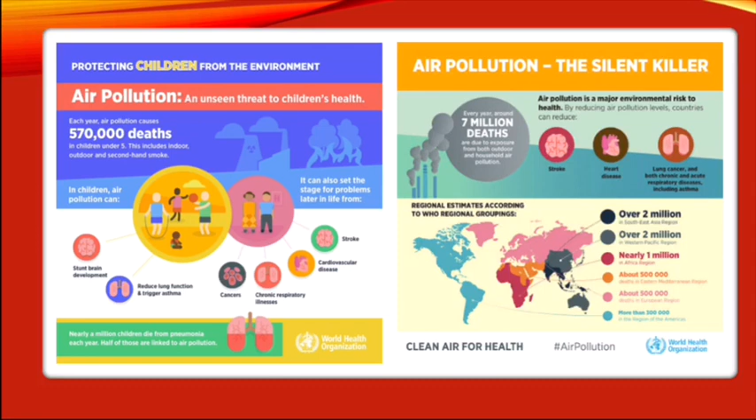Air pollution has been contaminating all around us, everywhere around the world. I can say that almost each and every year the number of deaths is increasing around us, everywhere. This problem needs to be stopped somewhere, and we as human beings need to work together in order to reduce, or to stop this problem from getting worse in the future.

And in conjunction to that, there are actually a lot of solutions that can be done in order to reduce air pollution around us. And one of the solutions that we can propose is to stop using diesel fuel and go for biodiesel fuel.

So these two things are yet different, as the one on the left side is diesel fuel. The diesel fuel that we are using nowadays thus gives a lot of harmful effects and side effects throughout the environment. The emission of diesel fuel is said to be way more contaminated compared to biodiesel fuel.

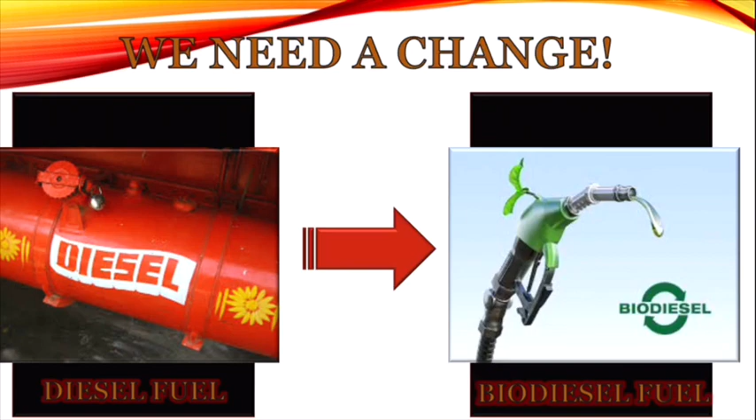So there are lots of advantages to using biodiesel fuel instead of diesel fuel. This kind of matter needs to be considered as we are striving for a better environment around us.

Before going further into the solution of reducing air pollution, the solution that was proposed just now was to substitute conventional diesel with biodiesel. So what is actually biodiesel?

A biodiesel is a clean burning fuel which is produced through a specific process called transesterification. Generally, the production of biodiesel consists of two main components, alcohol and triglycerides, as the main reactants, along with the presence of catalysts such as potassium and sodium hydroxide.

Most countries, especially Japan, America, and those in Europe, are practicing substituting conventional diesel fuel with biodiesel because of several reasons. Practically, biodiesel undergoes a more complete process of combustion compared to conventional diesel fuel. This results in reduced emissions from vehicles, as a complete combustion process occurs when using biodiesel.

Besides that, rather than using petroleum as the main ingredient for the production of diesel, vegetable oil and animal fat are used to replace it, which is considered much more convenient and environmentally friendly, as petroleum contains a lot of chemicals which contribute harmful effects towards the environment.

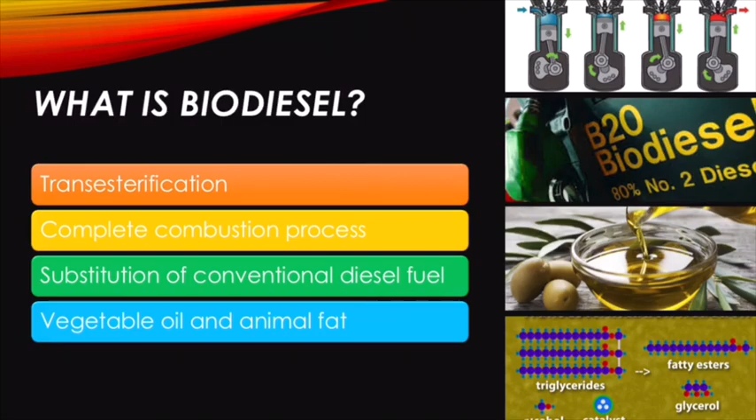By using vegetable oil and animal fat, which are known to be organic and safe, they contribute to a much safer and healthier environment. The oil itself contains fewer chemicals, thus the emission from biodiesel will be much cleaner compared to the conventional diesel we are using right now.

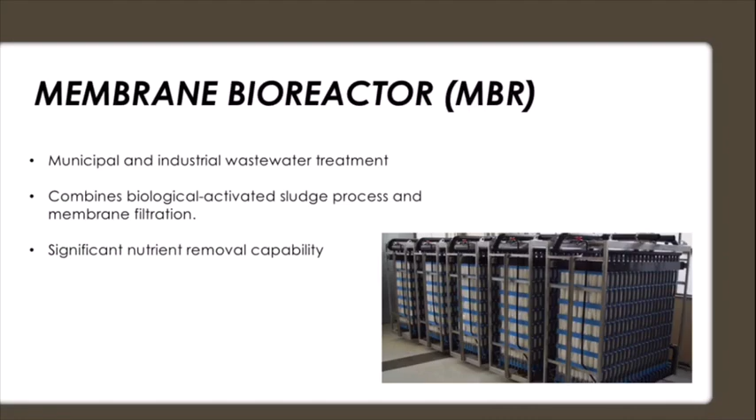Membrane bioreactor technology, which combines the biological activated sludge process and membrane filtration, has become more popular, abundant, and accepted in recent years for the treatment of many types of wastewater. It is the combination of a membrane process like microfiltration or ultrafiltration with a suspended growth bioreactor, and is now widely used for municipal and industrial wastewater treatment with plant sizes up to 80,000 population equivalents.

A ceramic membrane can be categorized under a cross-flow filtration mode. It could withstand more than 20 years for a certain life cycle of a ceramic membrane. The ceramic membranes are often formed into an asymmetric multi-channel element. These elements are grouped together in housings, and these membrane modules can withstand high temperature, extreme acidity or alkalinity, and high operating pressure as well.

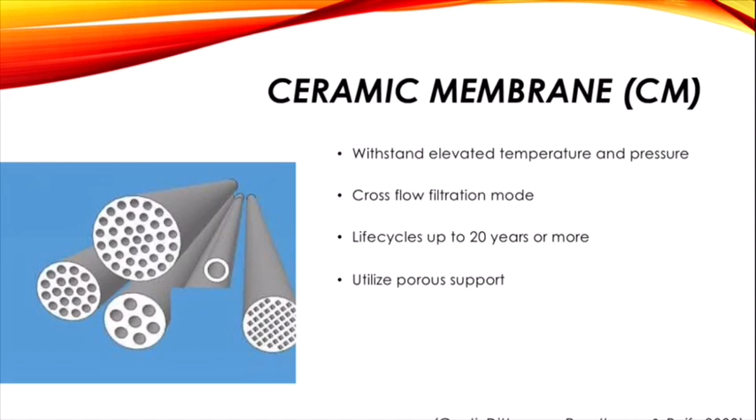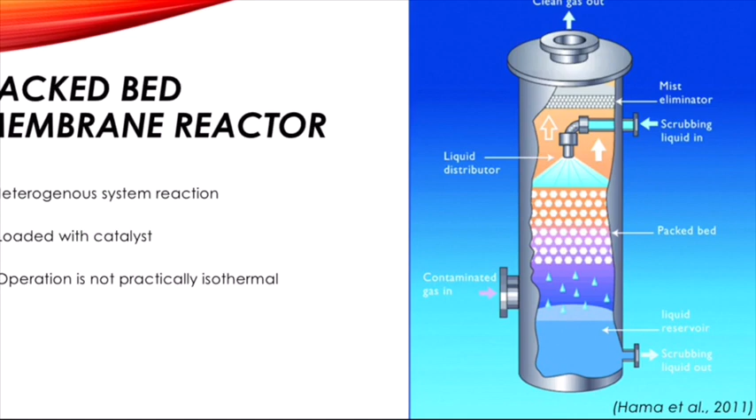A packed bed membrane reactor is categorized under a heterogeneous system reaction. This means that the reactant that will be inserted into the reactor could be more than one component or more than one phase during the reaction.

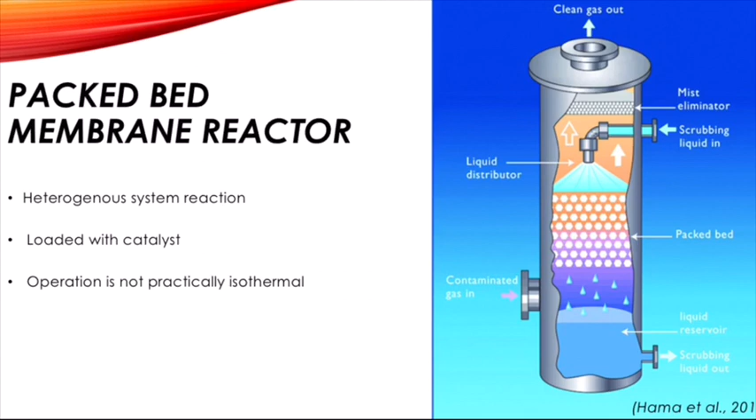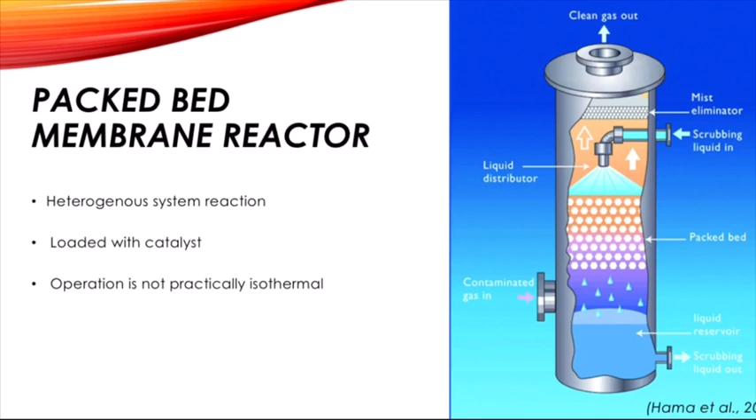A packed bed membrane reactor will be loaded with catalyst. The catalyst comes in various sizes according to the specification of the reaction at a particular time. The operation for a packed bed membrane reactor is not practically isothermal, meaning the temperature of the reaction during a certain process will not be constant until the end of the process.

Basically, based on the three approaches that have been presented just now, which are the membrane bioreactor, ceramic membrane reactor, and the packed bed membrane reactor, my group and I had a discussion, and we decided the best solution was to choose the ceramic membrane for the production of biodiesel. A SWOT analysis was conducted to see the strengths, opportunities, weaknesses, and threats of the solution chosen, which is the ceramic membrane for the production of biodiesel.

So what are the strengths of the ceramic membrane bioreactor? Firstly, it is mechanically robust, meaning it could withstand a high amount of agitation and activity during a reaction. Next, it has resistance towards ozone and chlorine, which makes it environmentally friendly and green. Last but not least, it has high heat resistance, which allows the ceramic membrane to withstand a high amount of temperature applied during the reaction.

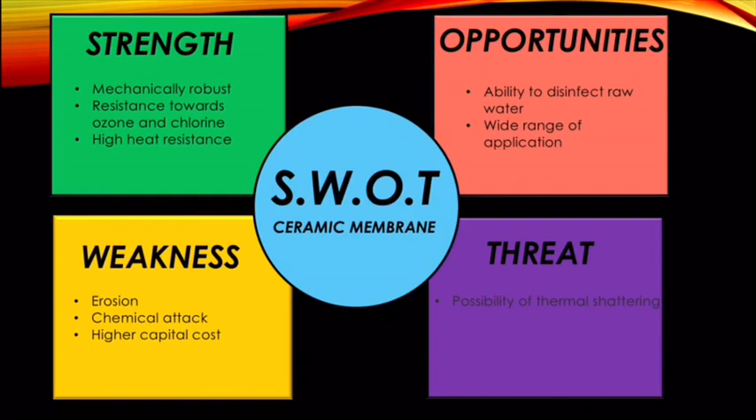So one of the threats that can be discussed here is that it has a possibility of thermal shattering. This could be simplified as the temperature of the reaction will change throughout the whole process, as the temperature is not permanent and could be easily changed throughout the entire process.

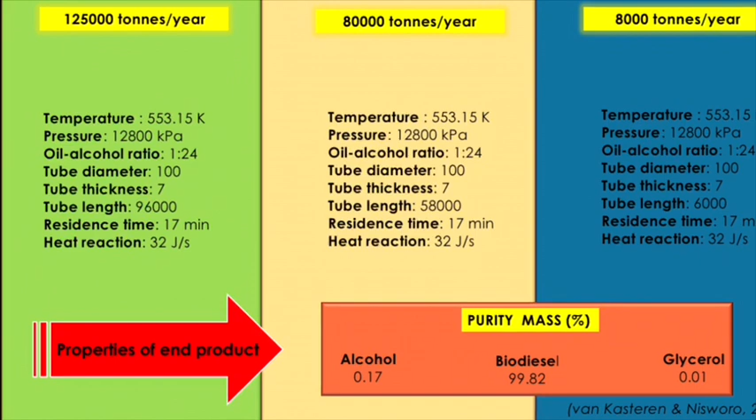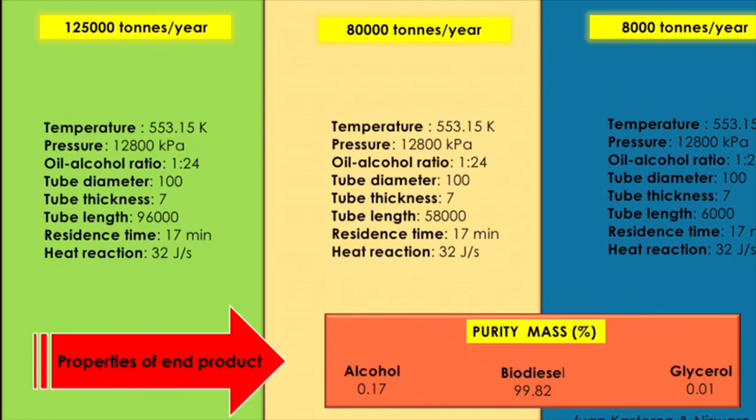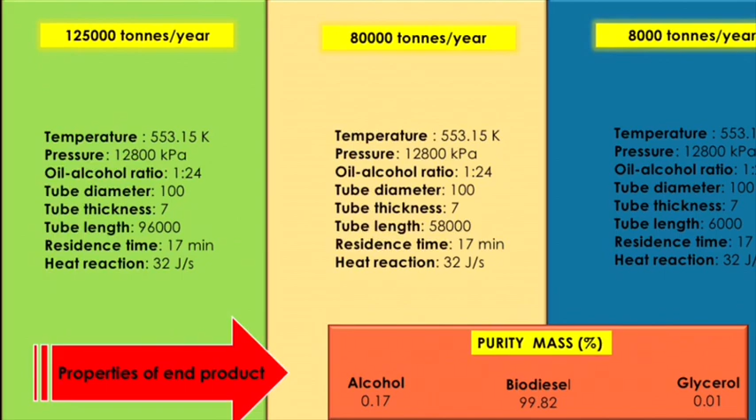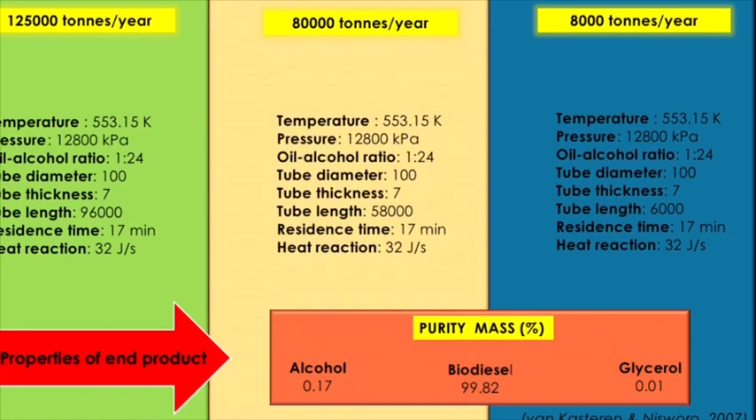As you can see in the slide as well, it is shown that the properties of end product for all three of the plants are equally the same, with the purity of mass for alcohol being 0.17%, biodiesel 99.82%, and lastly glycerol 0.01%.

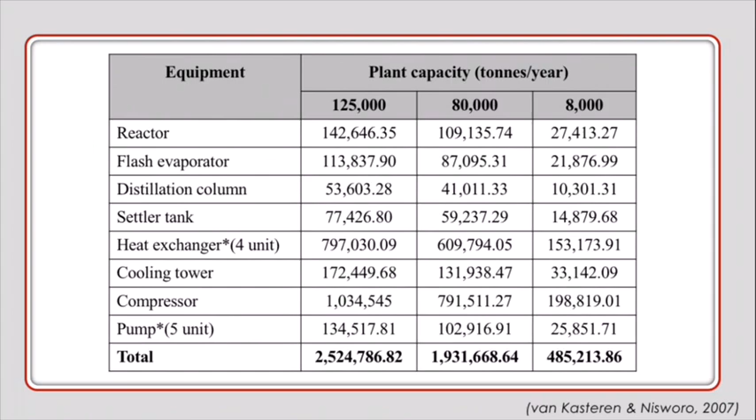So for the next slide, it shows the equipment used for each plant. There are several equipment being used, which are reactor, flash evaporator, distillation column, settler tank, heat exchanger, cooling tower, compressor, and also pump.

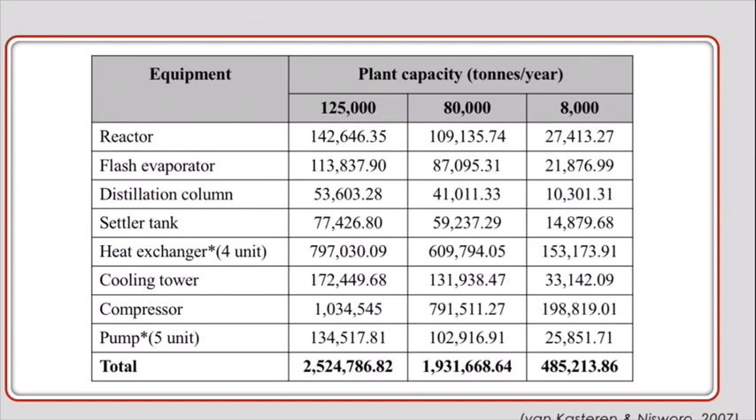So basically, we can see that the largest capacity of plant, which is 125,000 capacity, gives the highest amount of total price of equipment compared to the other two plants.

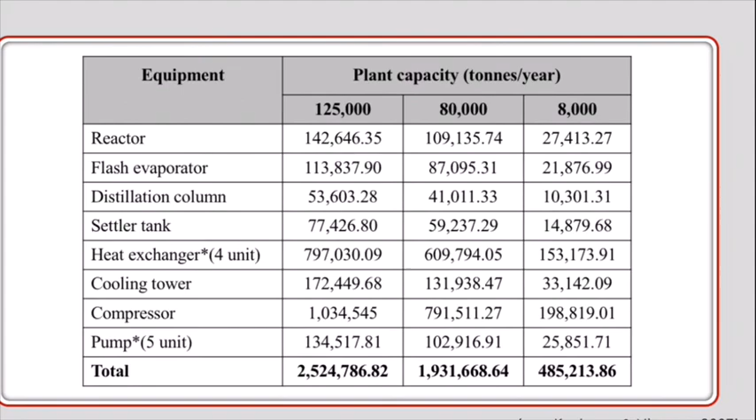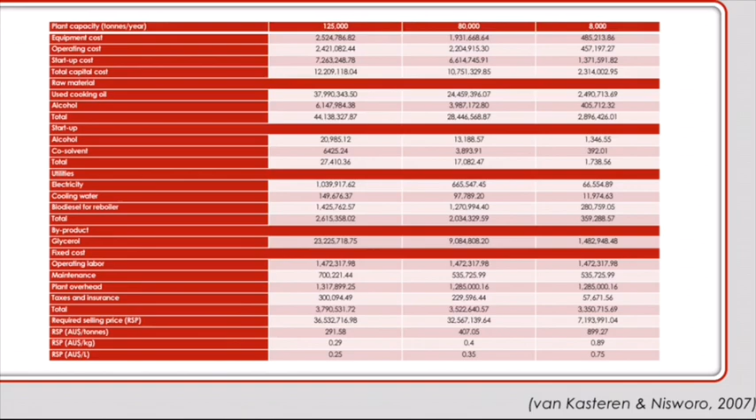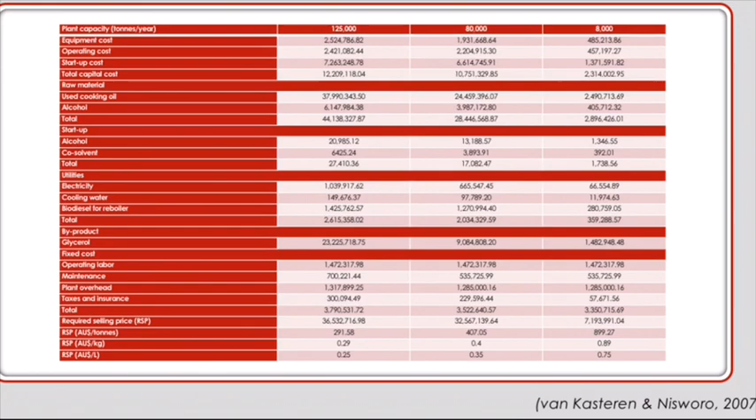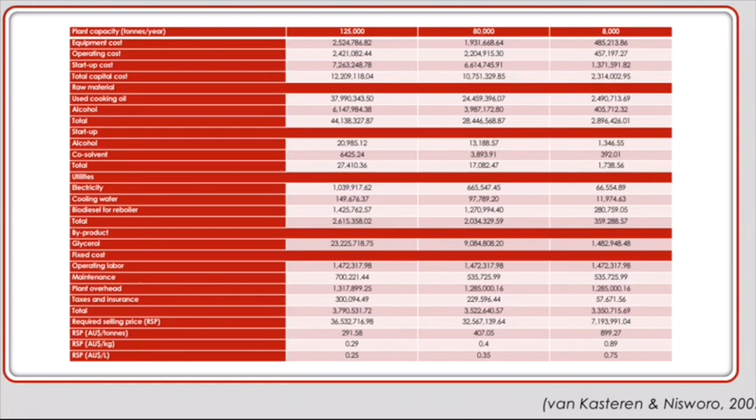So in result, the required selling price for the largest plant, which is 125,000, shows a much lower price compared to the other plants, as when we are dealing with a bigger plant, the production will be much higher compared to the smaller plant, which then will produce a smaller production for the end product.

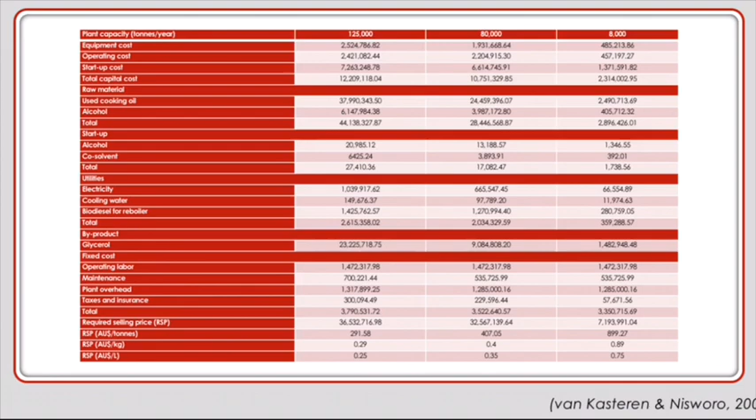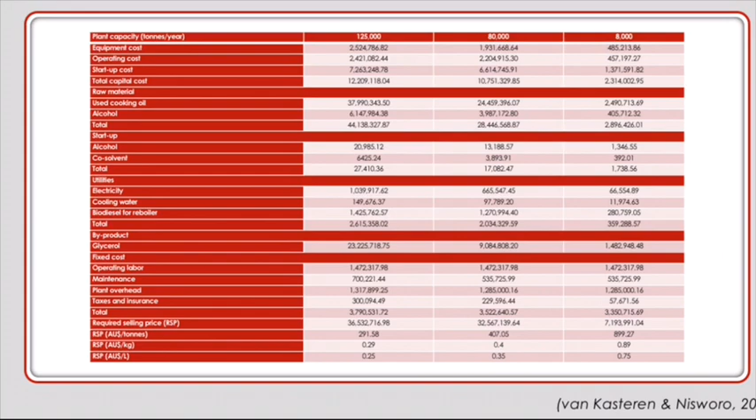So when we are dealing with a larger plant, the production will be much higher, thus the selling price for the production, for example, in this study, they are dealing with biodiesel, the RSP, or we can say the required selling price for biodiesel, will be much lower compared to these other small plants.

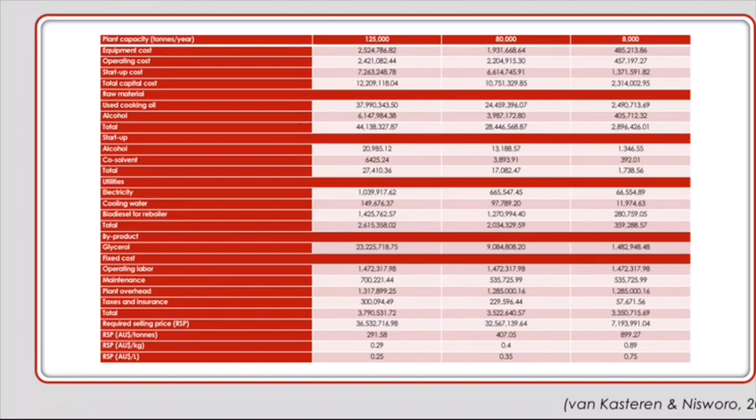In conclusion, there are a lot of benefits of using biodiesel instead of the conventional diesel that we are using right now. So the first thing is about the engine operation of certain vehicles becoming more efficient when it comes to using biodiesel. The air quality obviously will become much cleaner when biodiesel is being implemented or used, as biodiesel does not emit any harmful substances or chemical reactions into the atmosphere.

Thus, the quality of air will be sustained. And lastly, the energy security and balance will also be secured, because if we are using diesel fuel and all the petrol fuel, we are only focusing on that kind of resource only.

But then when it comes to using biodiesel, we are actually using organic materials such as vegetable oil and also animal fat. The resources are organic and come naturally, which somehow helps us save the environment, and also the outcome will be much better compared to the chemical substance that we are using.

Biodiesel causes far less damage than petroleum diesel if spilled or released into the environment. In other words, it is much safer than petroleum diesel because it is less combustible.